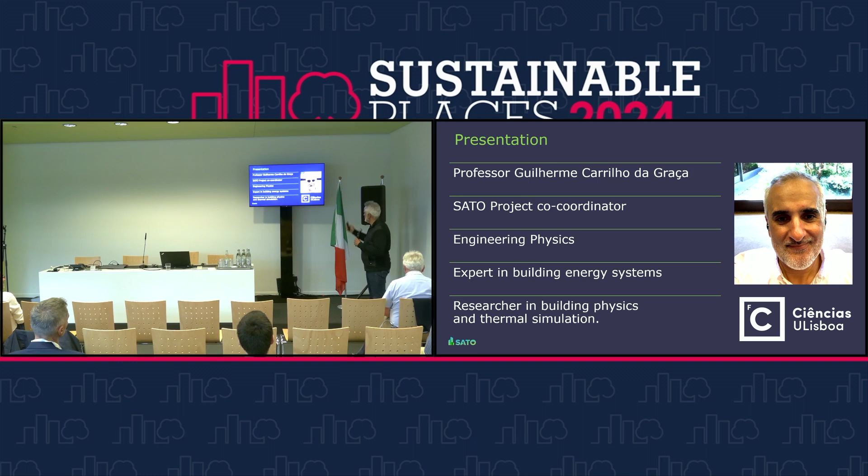I was just thinking, and I'm very confident that I will be presenting the frontal lobe of SATO. So we are now going a bit deeper, of course, and now we're at the brain level, and this is the frontal part. I don't know what it does, but you'll see. I challenge the next presenters to find the body parts of SATO that they will be presenting. That's me, so I'm working with all of you in the project. This is when I was in a private building, starting a great project. I was really happy.

So the idea of this presentation is to see an interesting application of our work. It's not new, but it could be very important, and it's related to the idea of a digital twin, which I think you're all familiar with, and the application of a digital twin to the area of buildings, and how this application actually works in the area where SATO is supposed to deliver its impact. Building on the last presentation by Miracle, what we are working on, and what can be quite relevant is how can we create a self-digital twin? So building on the self-discovery.

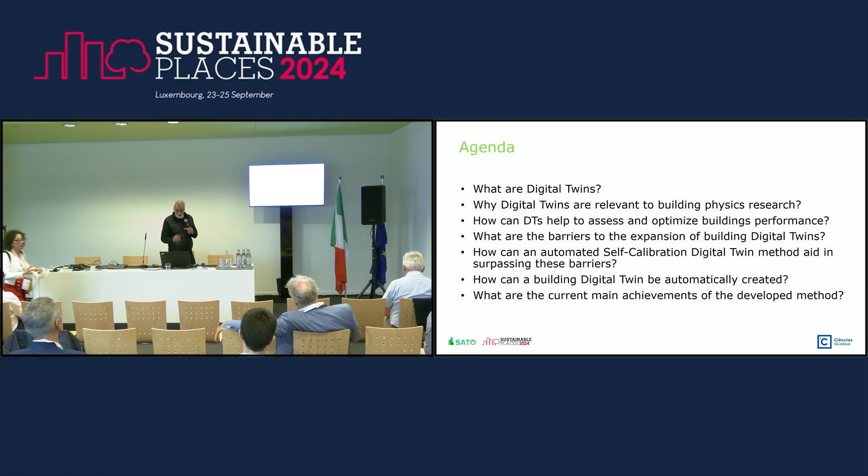The reason why the self is so important in SATO, well, it starts because the call asked for self-assessment, and I think it was actually a really good call, in my opinion. And because it will ideally work with limited human operation or interference. And of course, that's very valuable because it's cost effective. So if things happen automatically, we can save on investment of actual human resources. And in particular, when we think about a digital twin, the idea of creating a calibrated model of a building is not new. There's many instances of good calibrated models of buildings. Many, I would say 50, so not thousands. But they were obtained with very, very high investment of human resources, and often specialized human resources.

So of course, when we're trying to build a calibrated thermal simulation of a building, if we were to measure every parameter that goes into the model, or fine-tune that parameter by hand in the simulation, and compare the results with the measurements, we would have a high-quality digital twin, and we can do that today, and people have done it, but with very high requirements of expertise and human investment. And that is not realistic in light of the quantity of buildings, of the diversity of buildings. So every building is different in terms of service and commercial buildings, and also residential. And so you can't really replicate much if you're working by hand, and the investment is very large. So it makes sense to investigate a self-calibrating digital twin.

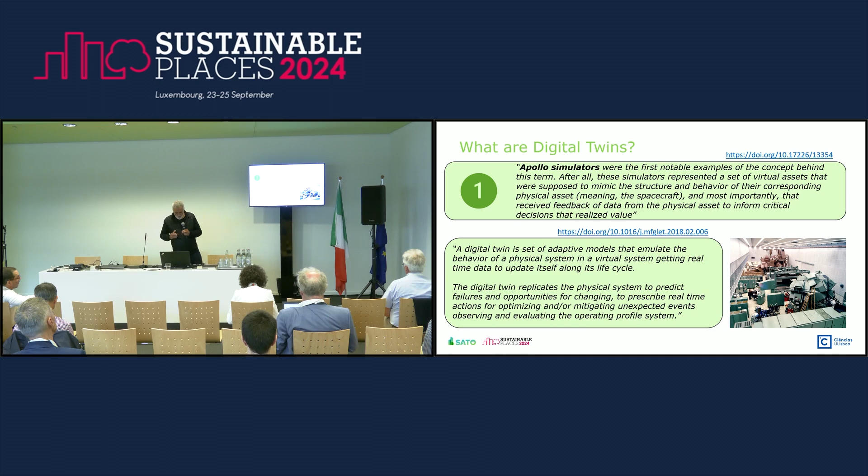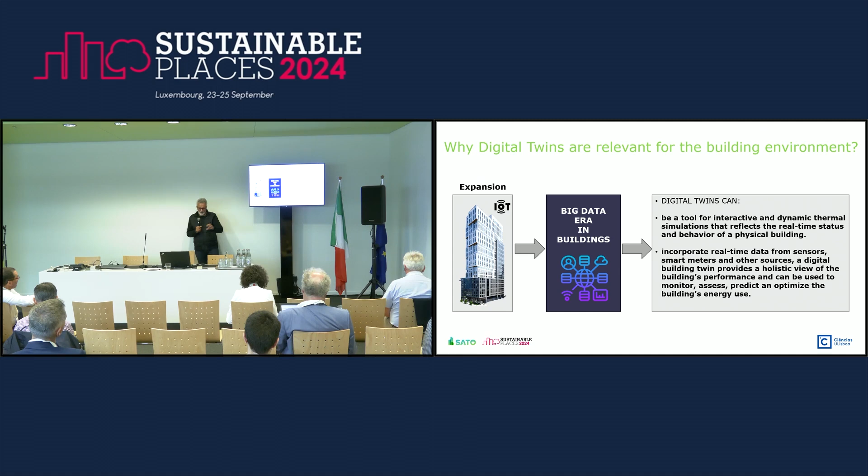The whole calibration process of a simulation, there are different ways of performing the calibration that we can work on, but the most basic is, let's say, the simulation model predicts 90 kilowatt-hour per square meter per year of overall electricity consumption of the building. Our bills show the actual running of the building. The bills show 80. So we just apply a factor of 8 divided by 9 to our results, and we call it the calibrated model. That's the most basic version of model calibration. The most sophisticated and work-intensive is going around all the parameters, measure them, put them in the simulation, look at all the building schedules, usage, and have the right number come out to begin with, without an ad hoc calibration factor. What we're trying to do with this service is to perform that automated calibration using the SATO capabilities.

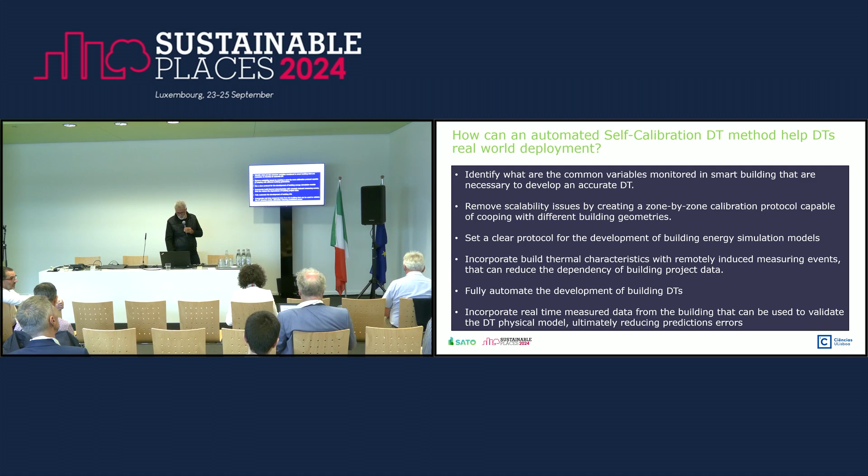And so, for that purpose, we work on a room-by-room basis. So our approach is, I've just described these different levels of calibration, and the approach that we're using is exemplified in this figure, which is a little bit hard to follow. But the idea is, as you've seen with the other presentations, we have the real building, we have a Cypress BIM model, because that's our partner. This model has a layer with thermal zones for thermal simulation, so we're coming down in terms of, let's say, realism of the model into a much simpler thermal simulation model. And this is the thermal simulation model with several zones that we will be automatically calibrating.

Now, how do we do this? What's the secret? What makes our calibration new? It has more requirements, so our calibration is more intrusive. And I think it's important to say this because it adds credibility to our claims. If we were able to calibrate by doing exactly what other people were doing, it would not be so credible.

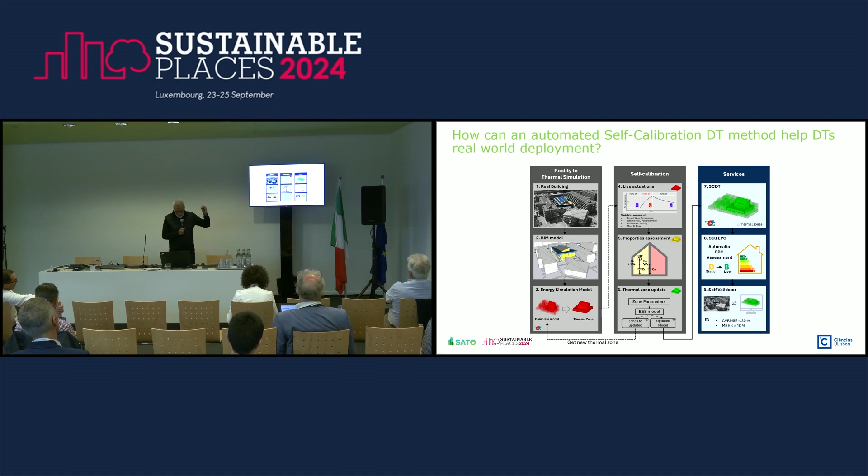So what we need to do is, whenever the rooms are not occupied and we're not bothering the building occupants, we actuate into the room and, for example, heat it and then look at the temperature decay, measuring the heat loss coefficient between indoor and outdoor. This is one example. We have a set of these virtual experiments, which are the assessments of SATO, and then we use the results of the virtual experiments, in this case an Energy Plus thermal simulation model, to calibrate on a zone-by-zone level.

You have here two cartoonish depictions of calibrations. In a room, we turn the heating system on, raising the indoor temperature, then we turn it off, and look at the decay of temperature. We fit the best U value for the external heat loss to the decay, and that's how we extract an as-built U value for the room on a room-by-room level.

We also do that in another assessment to identify the thermal inertia of the space and the furniture. These are also unknowns in many buildings, and these virtual experiments measure as-built effective thermal inertia, something you can't really get from design data. So we think this is very promising.

We do the same approach in different areas. For example, here is the work of Frederico, Nuno and João, who are working on these sites. These are postdocs and PhD students who are also in SATO, and will be presenting later.

For the heat pump, we focus on measuring the ratio between the actual COP of the heat pump and the theoretical Carnot COP. That's a parameter we focus on, the efficiency of operation of the heat pump. With this efficiency, we bring this coefficient into the simulation and obtain a self-calibration of the heat pump component of the system. So whenever there's an opportunity to perform a digital experiment or assessment, we do it, take the coefficients, bring them to the simulation, and claim we get more precision.

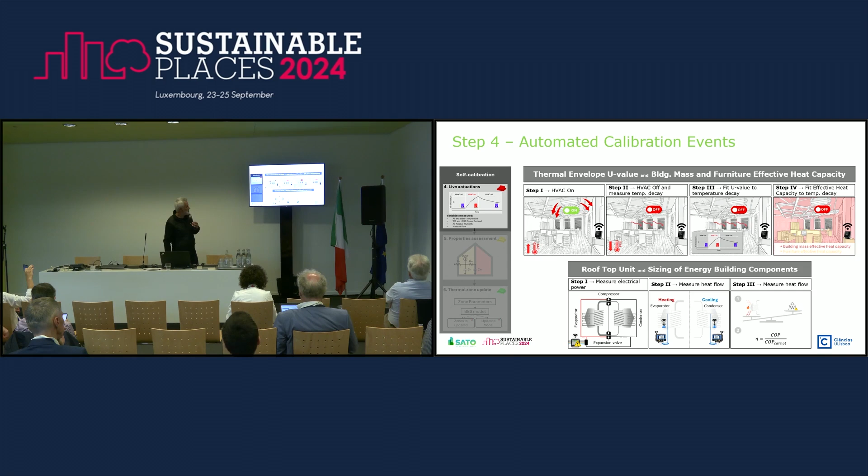This is an example of the parameters we extract at room level: heat capacity of the walls, furniture, heat loss to the outside are some examples, and the ratio of COP of the heat pump performance. I'm sorry here about the superimposition.

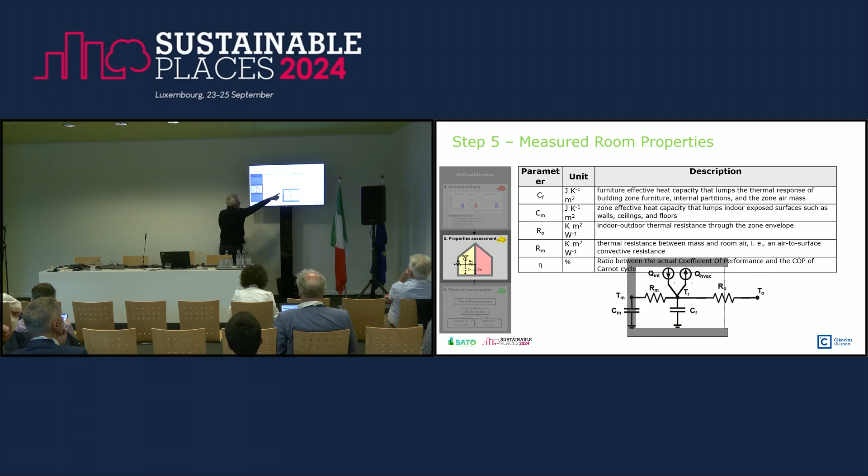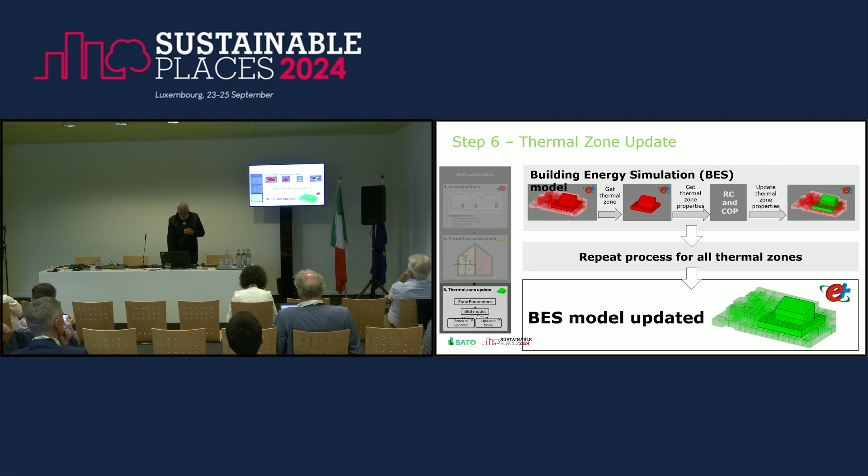Then, of course, we bring this to a model, as discussed, on a zone-by-zone level, and compose the whole overall building model. We're using Energy Plus, although that's not the main point, but there's already a connection between SIPE, which is our BEAM platform, and Energy Plus, so it makes sense. Because we are at the end of SATO and we have pilots, we already have some examples of the actual performance and capabilities of this approach. So we perform the calibration, update the model on a zone-by-zone level, and obtain a digital twin. There's some formatting issues, but it's fine.

So we have inspections, which are our assessments. They calibrate the twin. And then in terms of energy performance, we are able to update the theoretical EPC to an as-built EPC using the calibrated model.

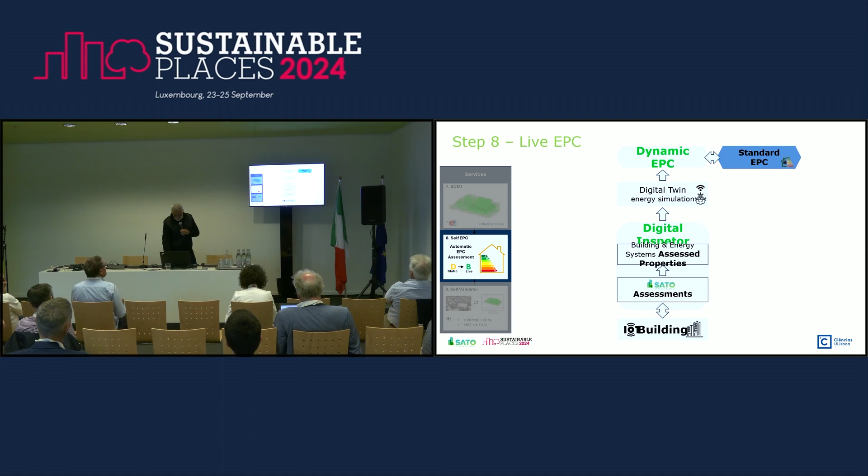Now let's look at the application of this in the pilots. Some pilots of SATO are residential. We have focused on detailed multi-zone thermal simulation for commercial buildings. As for residential, it's not the common approach, it's too heavy at the moment. So what we show you are applications in pilots, and then you have four levels of calibration.

You start, well, line number 1 is the measured temperatures in the building. Line number 2 is a simulation, let's call it standard. Number 3, we bring in the self-calibration at room level. And then in number 4, we bring in the HVAC calibration.

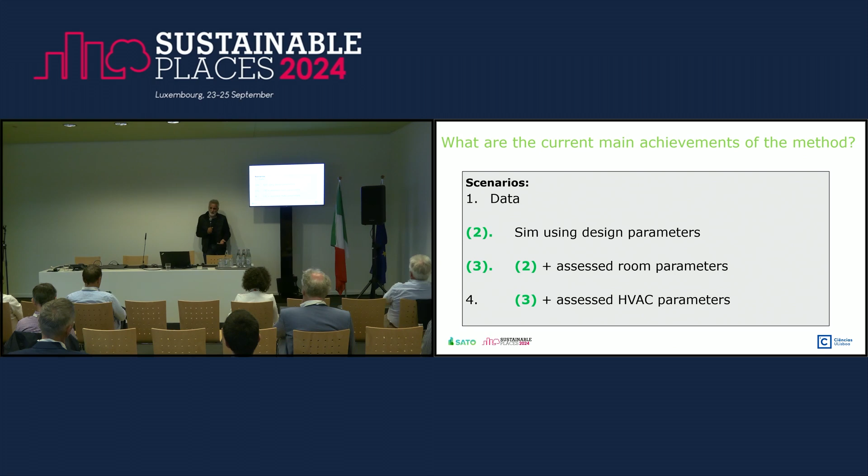The HVAC calibration, you can see in two places, because we are able to measure the effective heat delivery and removal of the HVAC system. So you get a better depiction or simulation of the room temperature profile when you turn the HVAC on and off, because we actually see how powerful it is in a given room. That's one level of the HVAC enhanced calibration process. And then at the thermal plant level, if we calibrate the HVAC model, we of course have much better predictions of electrical energy demand of the building as it's being used.

So we have two examples. This is an office building from one of our partners, in Seixal. We have one zone there where we have enhanced monitoring with SATO.

We have the whole building, but then we have a particular zone where the municipality installed new operable windows as an investment, so they're exploring. They're already installed in this zone. We have new windows, they invested, and if it works well, they may consider extending to the whole building, as this is a great building to have operable windows, and also a great climate and very peaceful neighborhood to do that. So we hope to have a good effect here.

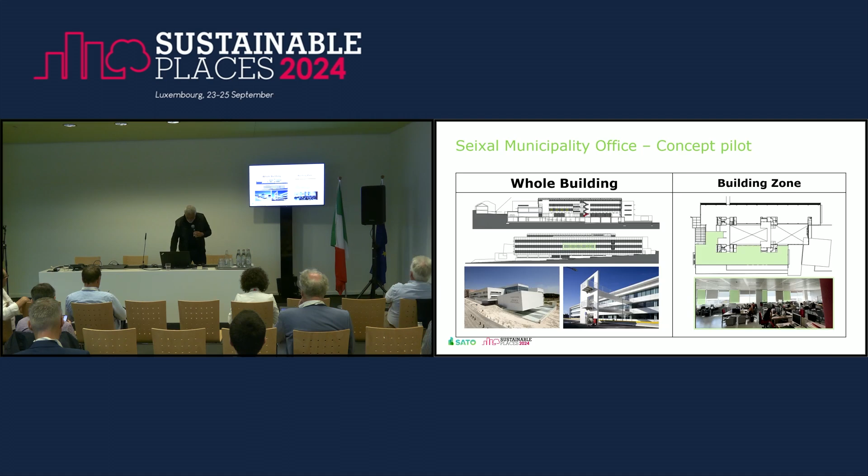The example of application from level 1 to level 2 is going from the purple line to the dark orange yellow line, where the measure is red. In a standard simulation model, you have issues with the effective thermal capacities of the zone that we are able to pick up by performing these experiments that give us the calibration. This is about as bad as thermal simulation can be, so it immediately changes the zone temperature very fast. This is a bit exaggerated. We are able to pick up both behaviors better.

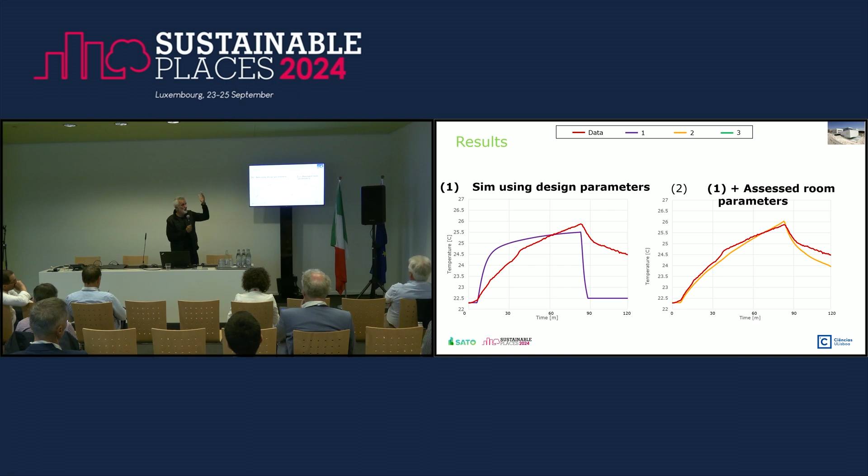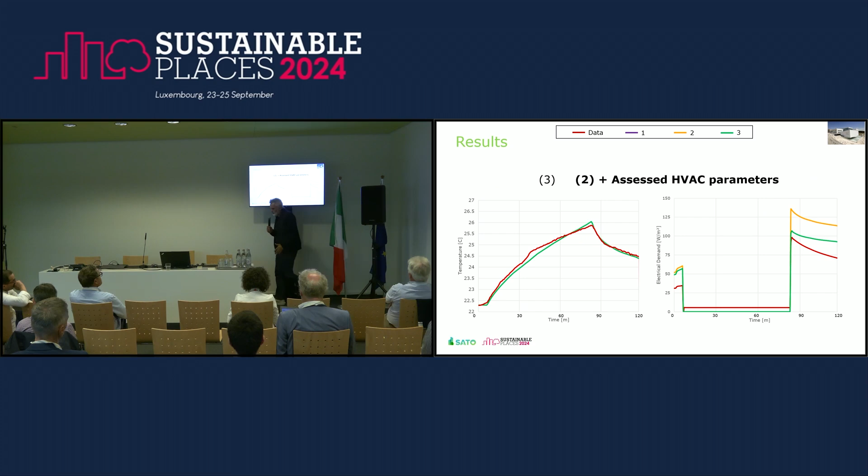As we add a finer, automated fine-tuning of the room HVAC, we get to the other levels of calibration, where we have a really quite excellent fit of the temperature. Let's automate it. Then we have improved fit, not perfect, of the electrical demand, where the data is red and we are green. So we're not perfect. Okay, nobody's perfect. So that's where we are.

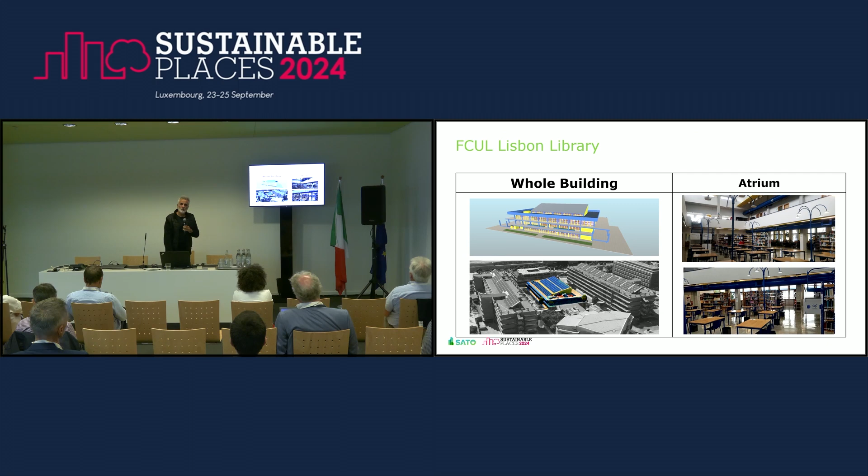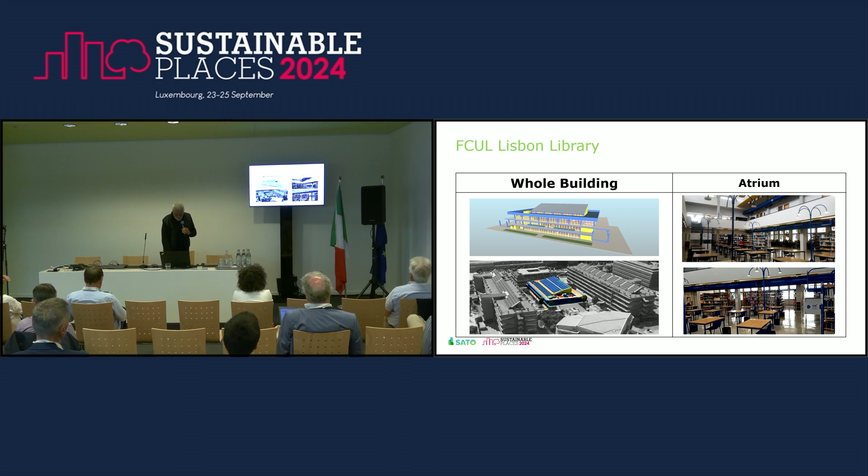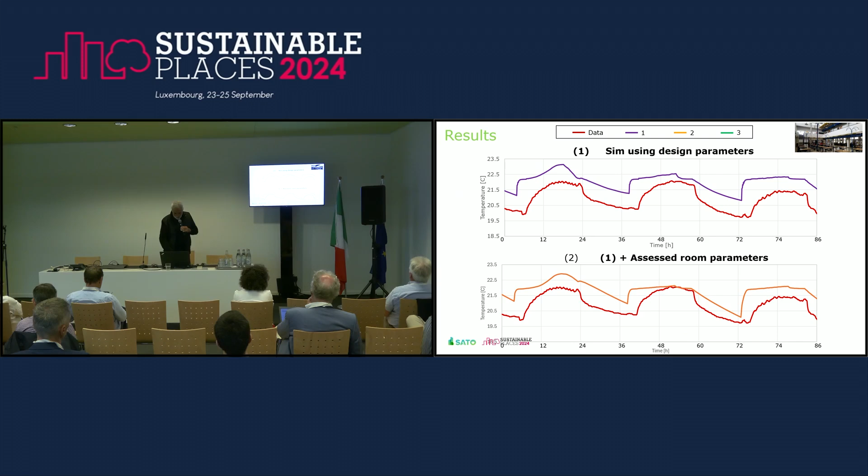Overall, where we are with this service is, in our perspective, we reached a good point with it, and we see a really good potential for energy optimization, energy refurbishment, and of course the whole idea of being autonomous. That's where it connects to discovery, because what Vinicius and Miracle showed related to self-discovery, you also have self-discovery of the capability of performing these experiments and when. So this looks really nice as something to be continued. Thank you very much.

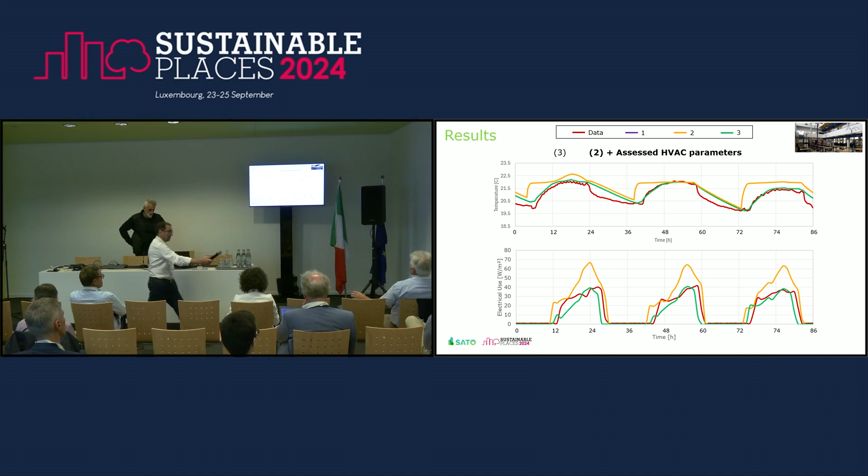Yes, I have a question, because now, of course, you have done two specific calibrations, one on the room properties and one on the HVAC properties. I would say, of course, then the results on these two issues are reflected to be quite accurate, because this is where you did the calibration. But what about other parameters where you did not do calibrations? How does the model perform on these parameters? Does it also improve those parameters, like I would say indoor air quality? Is the model now calibrated so it can actually do the indoor air quality?

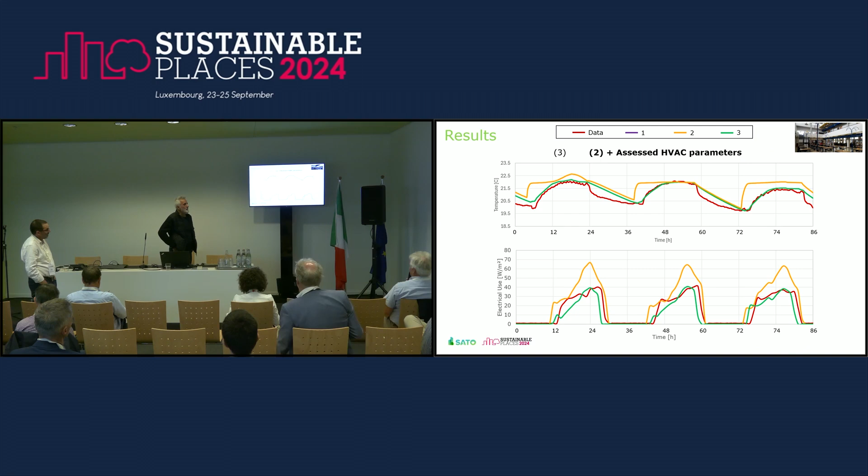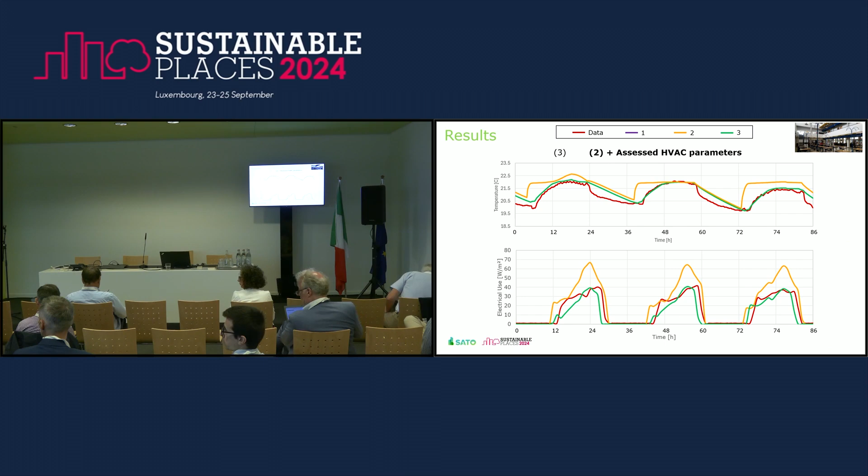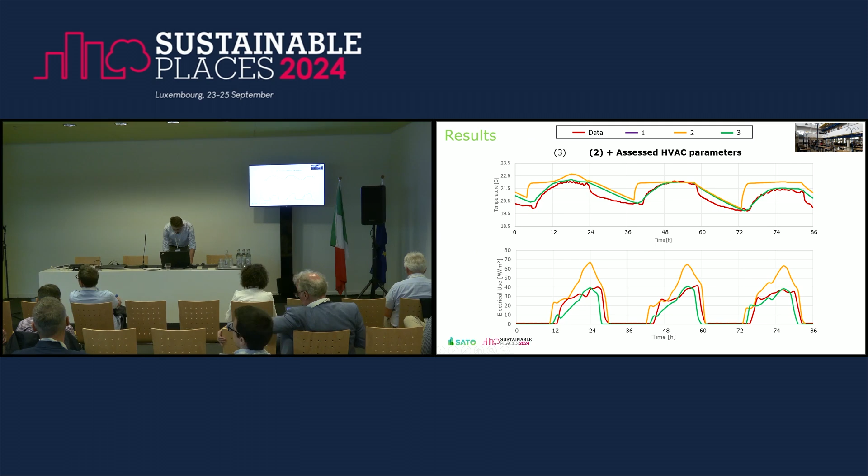So the work that we are going to present now, it was actually a challenge that was raised by our project officer when we were in the grant agreement negotiation stage, right before signing the contract. And it was about designing or developing methods that could be used to assess the real-life performance of appliances. So what Zygi will present is about this work, focusing on clothes washing machines, actually.

Thank you for the introduction. While I was listening to other presentations, I was thinking of the analogy that we have the brains, we have the heart. So perhaps that could be a good analogy.

Okay, so I'm going to present just a brief overview, not going to go into too much detail, about appliance real-life assessment. As we know, appliances consume a lot of energy amongst the total household energy consumption. So to mitigate this problem, of course, the European Union

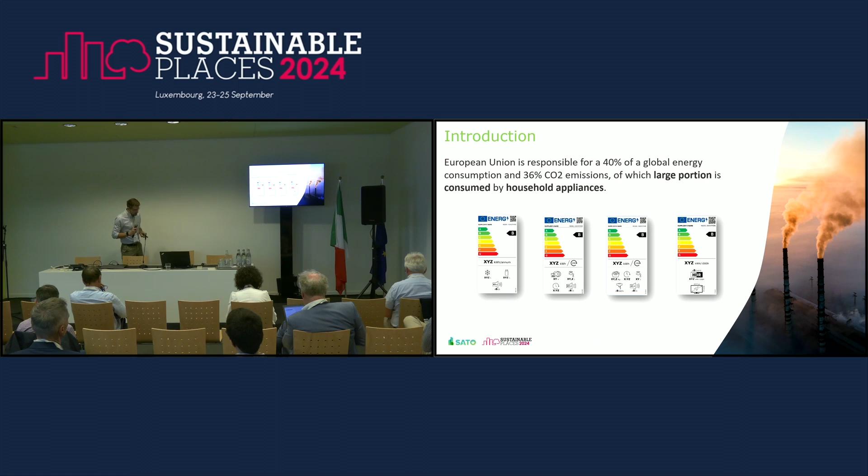created labels for the consumers, and it also creates this initiative amongst manufacturers to make more efficient appliances. But there is a problem, because the labels are quite static and they do not really consider real-life factors. So this is the main problem.

It doesn't consider the real utilization and operational factors. For example, in washing machines you can select multiple programs with multiple temperatures, environmental conditions. So, for example, how the appliance is affected by the ambient temperature, because sometimes people have washing machines, let's say, on the balconies, sometimes inside. So how does this affect it?

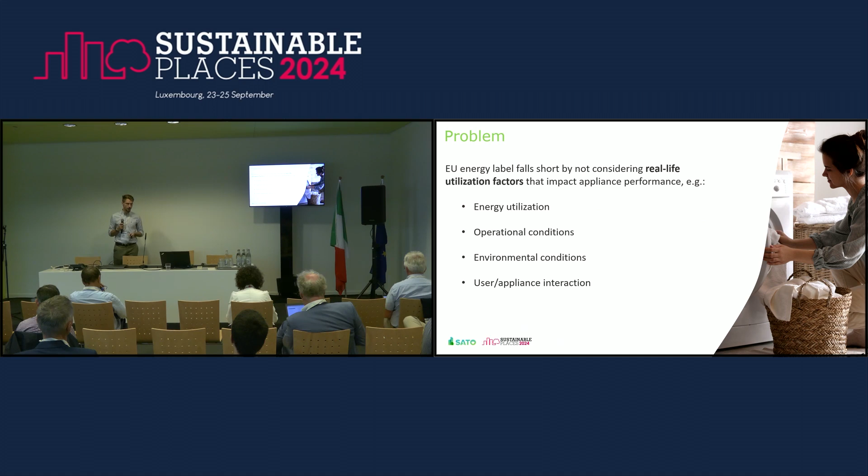And of course, the user-appliance interaction is not considered. This is the problem. And to work on this task, we have some limitations.

The first limitation is that there are no datasets available to actually work with. So we had to create our own datasets. And of course, there is no definition of what is actually a real-life assessment. These are the main keys in this presentation.

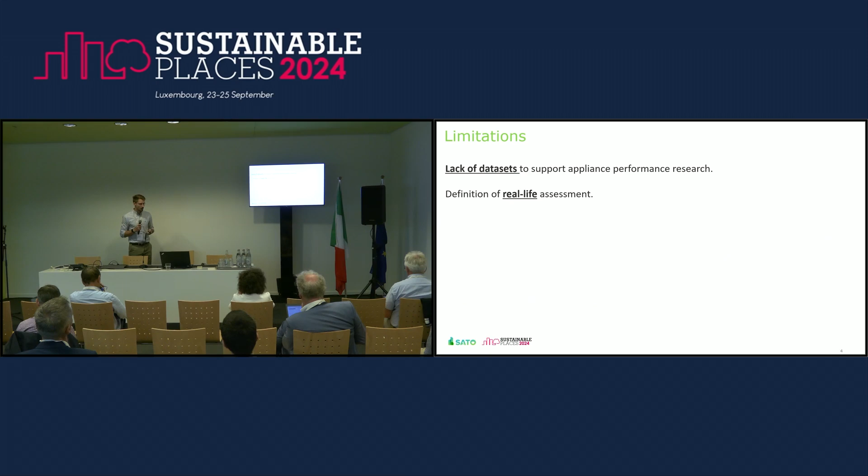So, starting with the lack of datasets, we started with data acquisition, measuring in the laboratory and in the household. We're acquiring environmental data - temperature, humidity - and operational data, so acceleration. We have water flow in and water flow out of the machine, so basically the consumption of water. The water temperature we measure through sensors, which I'll explain later.

We also measure drum temperature and door temperature, so we attach a sensor on the door of the washing machine. And for energy, we have measurements like current, power, voltage, frequency, and power factor. In the laboratory, this is done using a protocol.

So when we are acquiring the data, we label it - what was the temperature set in the laboratory while we were doing that, and of course the programs that were available on the machines. This is important.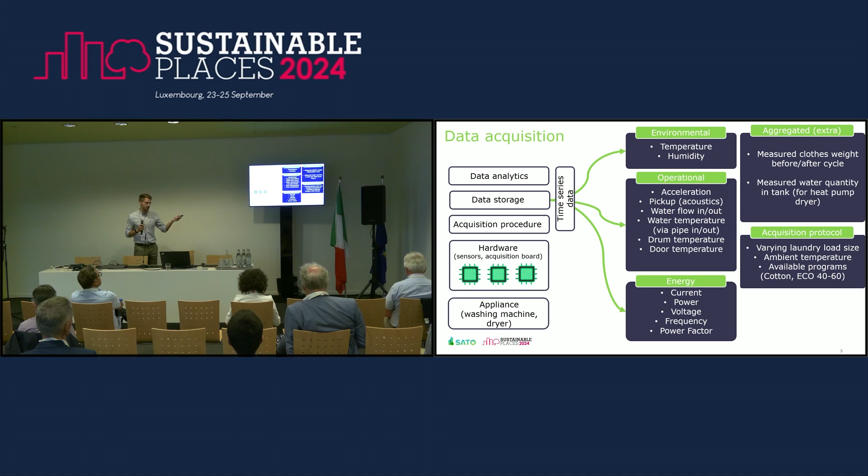So a little bit of parameters - we have one sensor on the top and the side, on the back. We have the current sensor. We put a sensor on the door, and we attach one on the drum.

And we also have water flow sensors, and we attach temperature sensors on top of the pipes to try to measure the water temperature. For the dryers, it's a little bit different because we put the temperature and humidity sensors inside the lint trap chamber, and of course we also have the current sensor and the accelerometers.

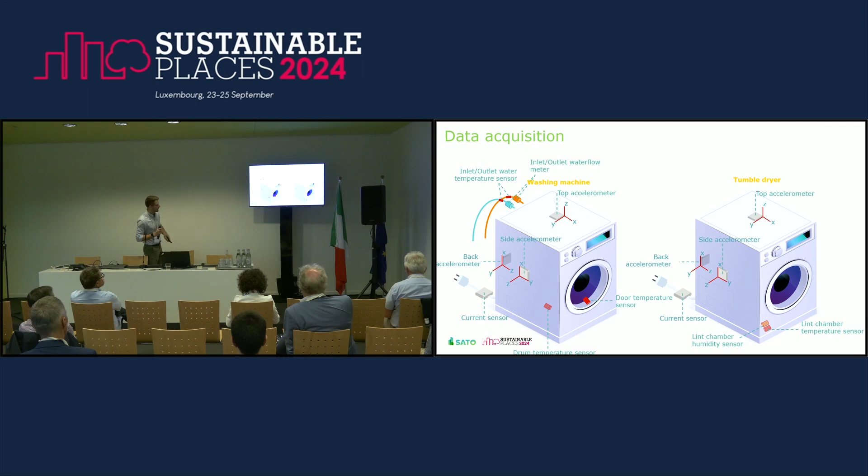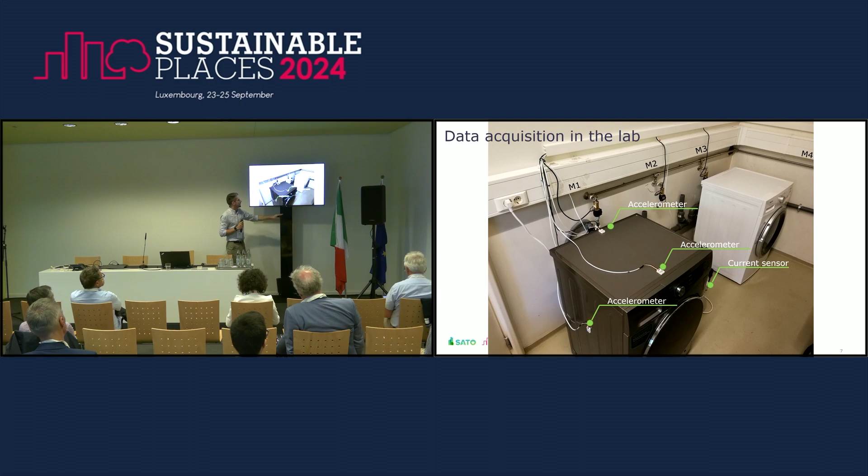Just a little bit to show how it looks like in the laboratory. This picture is actually old, because currently the accelerometer is in the middle. And here you have water pressure sensors and water flow sensors and all that. So this is basically the setup in the laboratory that we are working with.

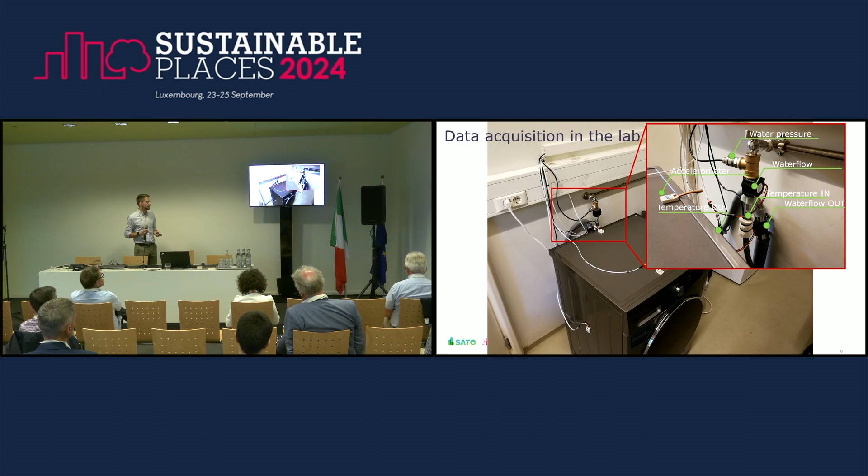To control the temperature in the laboratory, we have a big AC unit while we are doing the data acquisition. Okay, so this was the laboratory part.

And we also deployed in the SATO pilot the acquisition boards. We developed data acquisition kits that were a smaller version, let's say, of the acquisition platform that we have in the laboratory. And of course, we use exactly the same sensors, the same acquisition frequency, to replicate as closely as possible what we did in the laboratory.

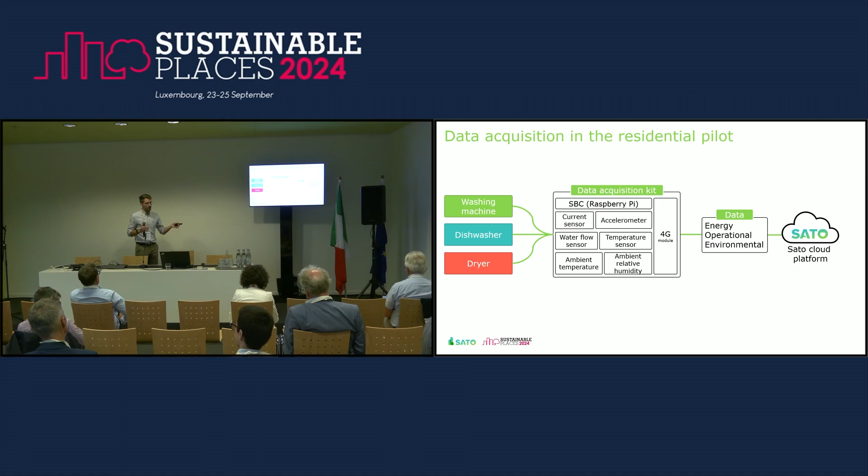And then, of course, all this data is being sent to the SATO platform. So this is how the acquisition box looks like.

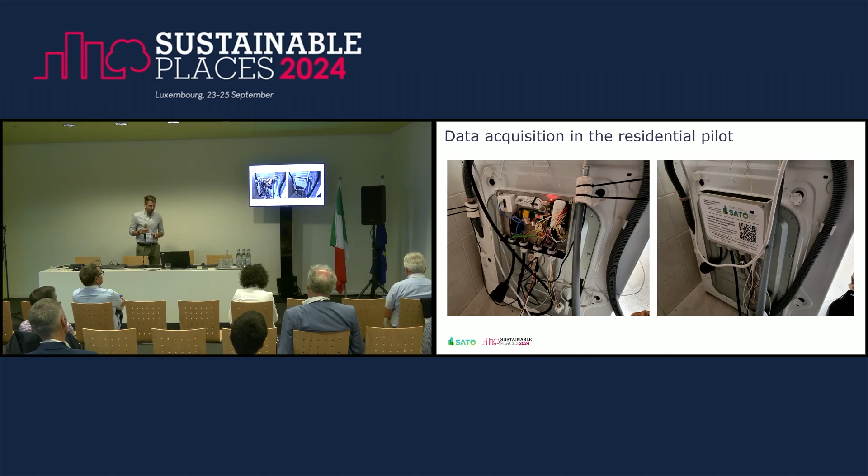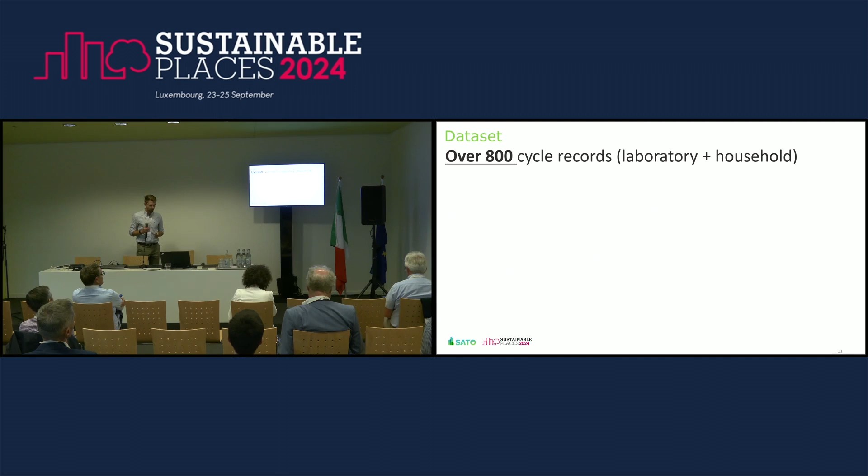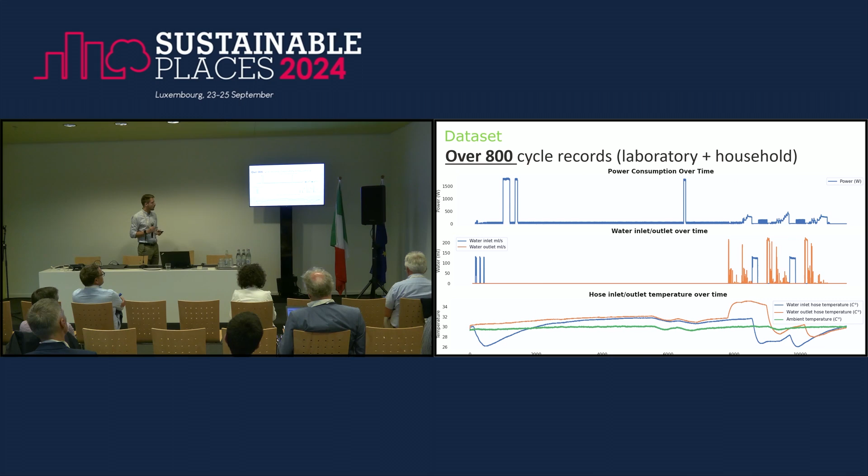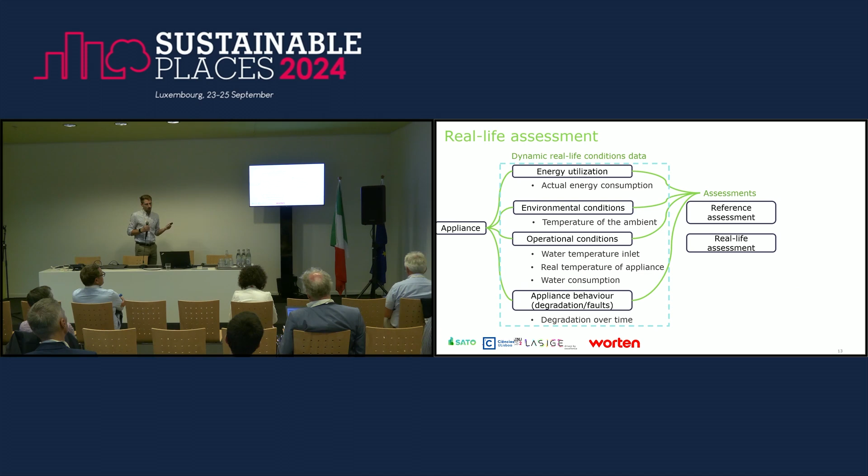Okay, so this was the dataset part that we were working on. Now let's go to the real-life assessment. So what can we do with real-life assessment? We can do reference assessments and real-life assessments. What are those? Reference assessments, basically we can use the data that is available for us from the EPREL database to compare baselines of what we are acquiring and what is registered officially in the EPREL database. And then we can do the real-life assessments. So based on the data that we acquire, we can do, for instance, resource and service provided KPI. And of course, the resource consumption, so how much water was consumed, and, for instance, the environmental impact, which would be like CO2 produced.

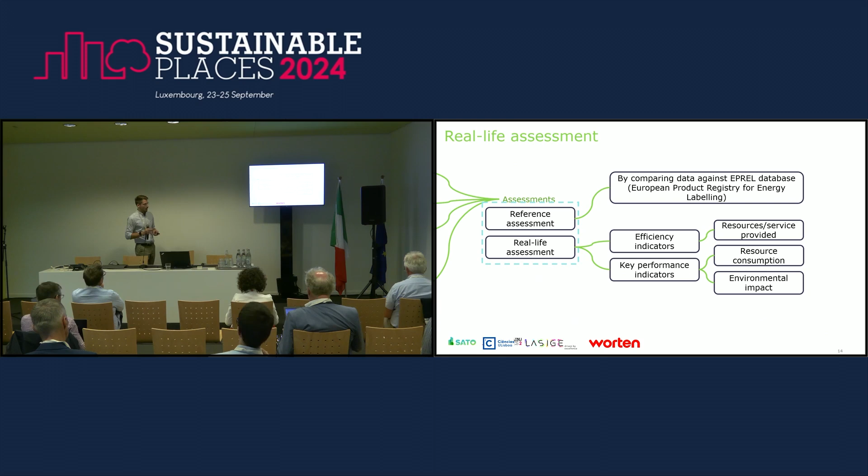So how can we do these real-life assessments? Of course, when we gathered enough data, we started to look into the data to explore it, to see what's going on. Because to calculate the key performance indicators, we need to know the weight of the clothes that were put in the machine. We cannot ask the user every single time to provide us this information, so we have to extract it somehow. So we came up with this soft sensor approach.

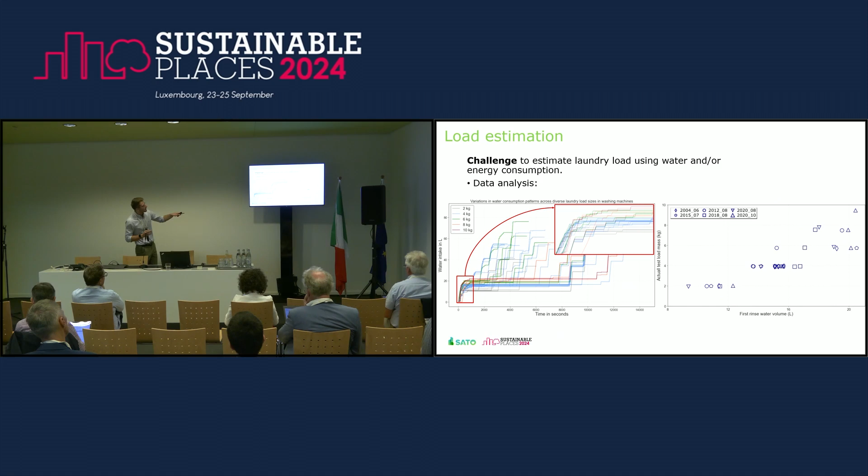Okay, and here what we see from the data analysis is that the first rinse of the washing machine quite well represents the weight that was inside the washing machine. It's almost a linear model, basically. So we worked on two approaches to extract the weight in the washing machine. The first approach, that I was mentioning, is that we use the amount of water that was taken in at the first rinse. Then we apply machine learning models to extract this information and estimate the laundry load.

The second approach was to try to do basically the same thing, but using only energy consumption data, so not including the water consumption. Because the idea is to reduce these additional sensors as much as possible, and ideally just plug the appliance into a smart plug and have all these assessments done for us based on the energy consumption data. So in terms of KPIs, what do we have? We have two main KPIs: water consumed per kilogram of laundry load, and energy consumed per kilogram of laundry load.

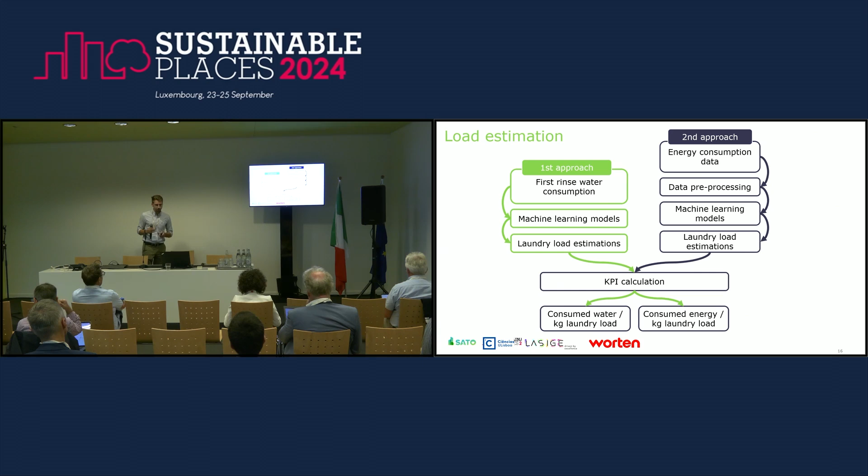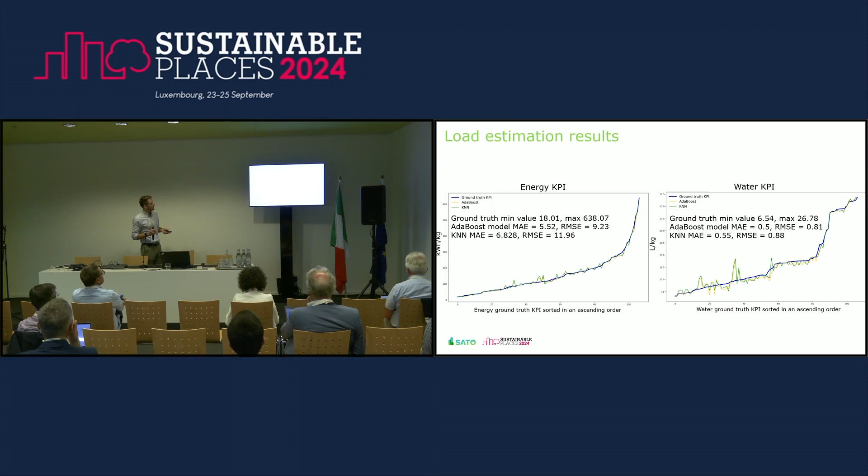Okay. So these are the results from both approaches. The first one is based on using the first rinse water amount to extract the kilos that were put inside the washing machine. And the second approach, right now, is a little bit worse than the first one, but we have some ways to mitigate these false estimations that I will explain a little bit later for you. And these are the results of already calculated KPIs. So you have the ground truth and the predictions of the KPI, for the energy KPI and water KPI.

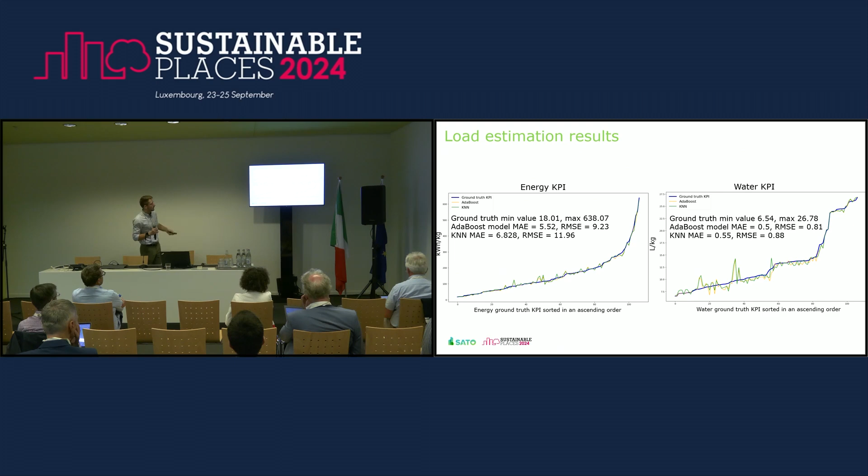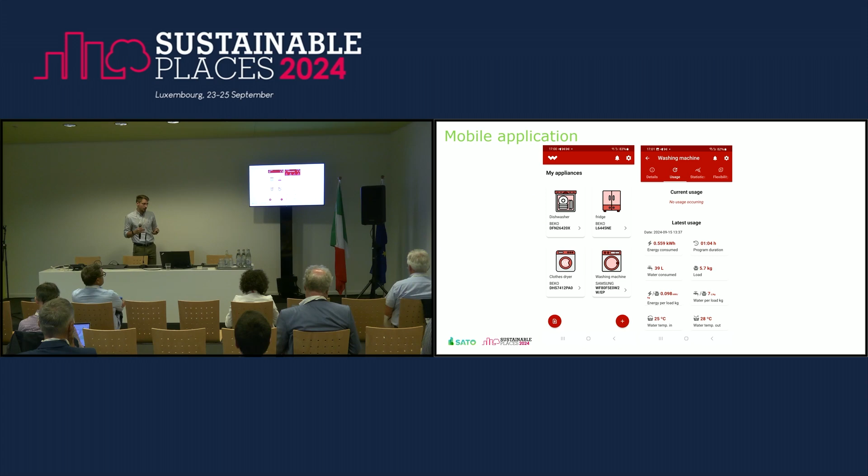Right. So we do have a mobile application developed, and the users that are participating in the project have all this information available in the mobile application. So why is it good? People can compare their washing practices, for example, depending on how much clothes they put in the washing machine, what kind of program they selected, what was the impact on how much water and energy they consumed, and how well the machine was performing in terms of the KPI. This can help users decide better washing practices at home.

So, for the conclusions, we created this system to acquire and support laboratory and household research for real-life energy efficiency, and it resulted in a data set that is going to be publicly available.

So then, of course, we also defined the real-life appliance energy efficiency, how we can calculate it and present it. We have models that perform fairly well to estimate the laundry load. It is actually very important to calculate the KPIs. And we developed a mobile application that helps consumers to make optimized choices, or to help users, to guide them to make better choices in terms of their washing

Check. Okay, that works. Hi, everybody.

Okay, analogy to the body. I think that all these assessments that are taken in SATO, or provided by SATO, are basically biomarkers. So what we are trying to do is to get it in some sort of a format that is understandable for the patient. So, Konrad, drink less alcohol, or stop smoking. This is basically what the smart readiness indicator is, I would say, for buildings.

So forgive me my ignorance that I'm showing you the next slide at this conference, which is called Sustainable Places, because I guess we are all aware that a lot of energy is consumed and used in buildings, and that we have to get our emissions down. And that's why the European Union really tries to reduce them by 2030, and we are trying to become decarbonized, especially in the context of the building stock, by 2050.

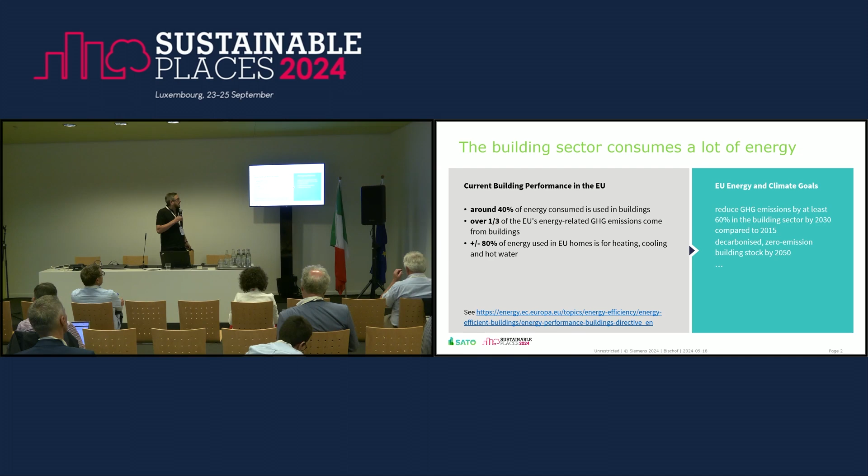So in order to do so, the smart readiness indicator was introduced, and that's a framework that is going to be used for rating the smart readiness of buildings, because things like SATO and other projects and methods presented here help to optimize building consumption. As we've seen before, if we control when we open or close our windows, we can drastically reduce the energy used by the HVAC system. So that's something that will help us to reach that goal.

And currently the SRI is in a testing phase, but it's going to become mandatory in 2026 for buildings of a certain size. And what it does is it assesses a building's capability in three main domains. On the one hand, we're looking at the energy efficiency and the overall in-use performance of a building. Then what's also necessary these days is that we can adapt to what the user actually wants from the building. And the last thing is the integration of buildings into our energy system, because basically they're batteries, and we can use them, for example, for peak shaving or participating in energy communities and all these kinds of things that further help us to make things a bit more optimized.

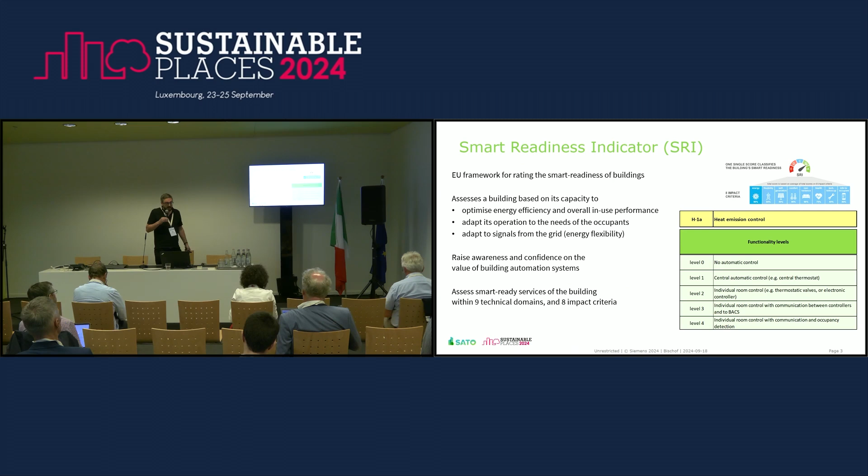So basically, this assessment is done in a building based on 9 technical domains and 8 impact criteria. And you can see here an example. We have functions that can or cannot be present in the building, and they can be present at certain levels. We start at level 0, which is the least smart way, so to say, and level 4 is the smartest way. Here we have heat emission control, and heat emission control level 0 is that we have no automatic control, and level 4 would be that we have individual room control with communication and occupancy detection.

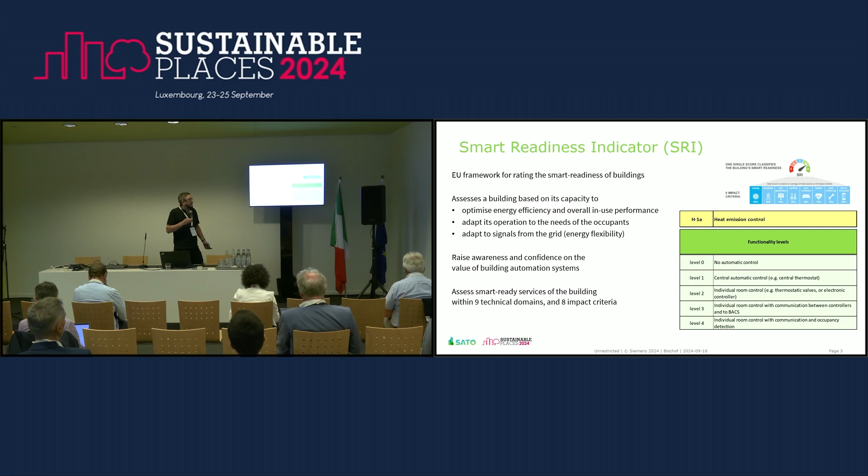Now, how do we come up with the smart readiness indicator of a building? Well, basically, we have for now an Excel, so there are several versions now, and we take the building operator and an expert, and they assess the building.

They have a look at the documents, they have a look at the building models, if there are any, what appliances are in there, and they basically rate the building, and they go through all these functions that are there, and they basically then assess whether or not a function is present and at which level it's present. And they, of course, also have to specify where the building is located and what the use of the building is. This all comes into calculating the SRI.

So we have this done for all the pilots that we had in SATO at the beginning of the project. But this is something static, right? This is something that you do once, and you don't want to do this every year, because this costs time and effort. How can we get from something that is currently static and maybe done once to something that can be performed continuously?

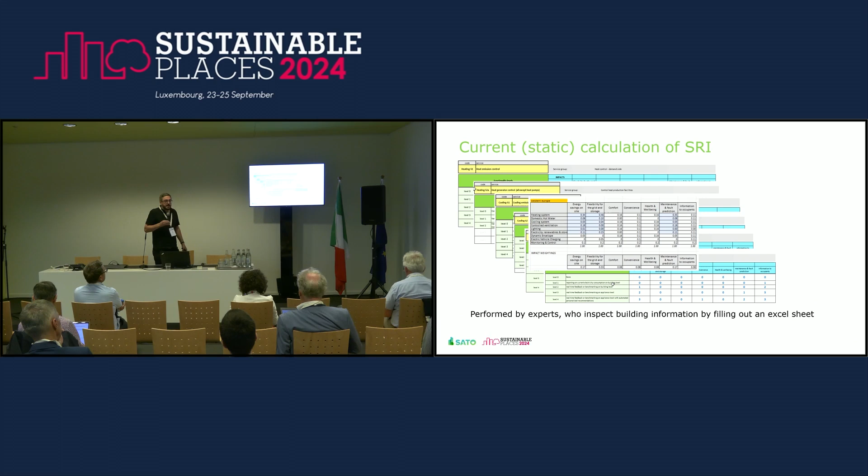So what we can do is look at the assessments and, of course, at the services, which are accumulating several assessments together and then using them to optimize the building, in order to see what SRI domains and services they actually impact. And this is something that we did. So we basically went through all the smart-ready service functions. There are two ways of calculating the SRI: a simple version and a complex version. We took the simple version because it has fewer functions.

But what we can do is basically assign SATO assessments to a certain function. Say, if this assessment is present in the building, then we can assume that this building has a functionality level for this respective function of, for example, 2. This is one way of doing it. Another way would be to say, if this assessment is present and we get a certain value out of it, then this indicates a certain functionality level.

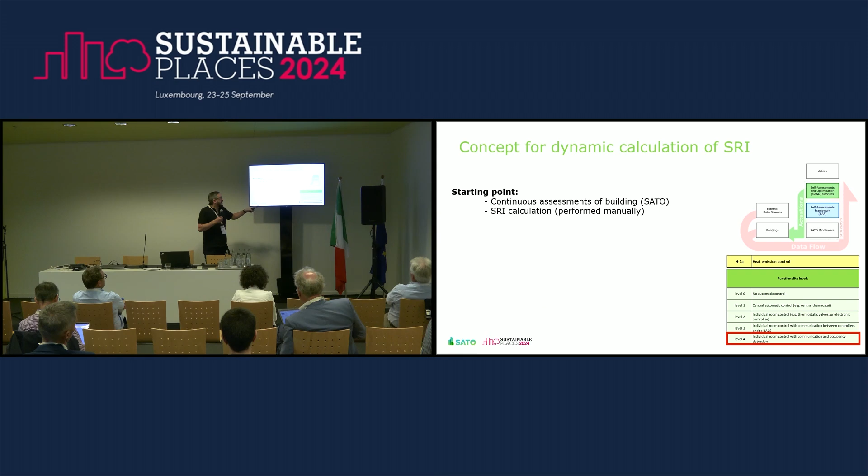Now, this is basically where we're starting. And once we have this link between the services and the assessments, then we can do a recalculation, whenever we please. Let me just go back. Let's consider, and this is a very coarse example, that the expert looked at the building and said, based on what I see in terms of appliances, we have level 4 because we have individual room control and occupancy detection, and those things work together.

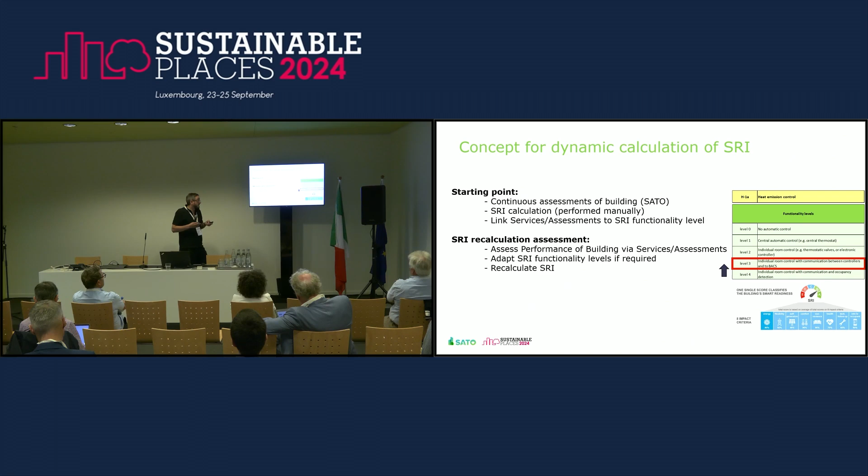Let's assume that. And now the building is in operation, and we basically see that heating is not really linked with occupancy detection. While these things are there, they're not really used. So while the appliances in the building suggest a readiness level of 4, in actual use we see it's not really there. This is what I meant before, giving us some feedback and telling us, hey, do something. Because maybe there's something wrong and we have to check level 4.

So how do we calculate? We're back at the semantics. So basically what we decided to do was to use semantics to do the calculations. As I said before, the SRI is currently in a test phase implementation with Excel sheets where we can basically put in the information. But this is, for a computer scientist like me and others of you, not really satisfying. There's a lack of standardized information model exchange, and how to version them properly.

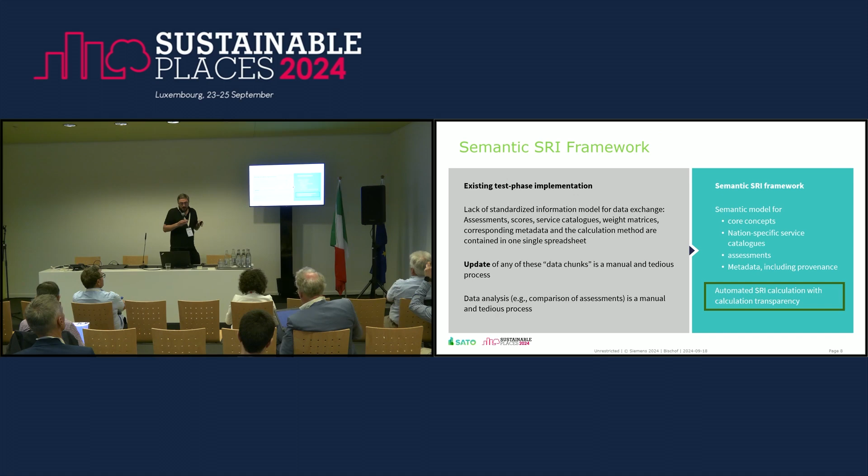So a better way of doing that in this concept, and this also ties in perfectly with the SATO core, is to use semantics. Basically derive a semantic model that incorporates the core concepts, also all these things concerning different national specific services and regulations, and allows us to calculate this. With this, we are able to calculate SRI automatically, and it's transparent how that works.

So here's just why this is a cool thing. It makes things fairly easy and really integrates well with what we have in the SATO platform, because we don't have to fill out anything anymore. It calculates and we know why it works. And the nice thing is, for the future, it's also easily integrated with other existing building models, such as Brick, BOT, and so on.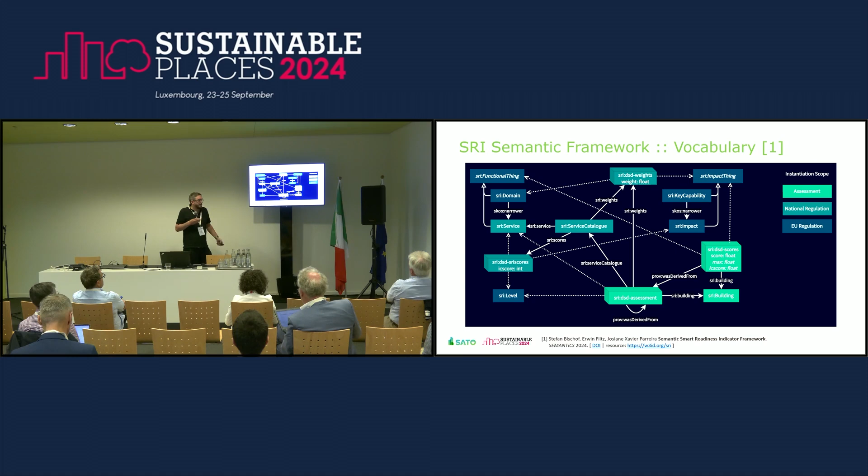Okay, this is basically what we have done. Now, how is it working in the system itself? What do we need? Initially, we need some sort of a baseline SRI. For this, we can use an SRI assessment performed for a building, so we have here an Excel sheet. What we also need, in some sort of format, is this link between assessment and SRI. These are inputs we require, and we upload them to the SATO platform, convert them into an ontology and store them in the SATO knowledge graph, where they reside.

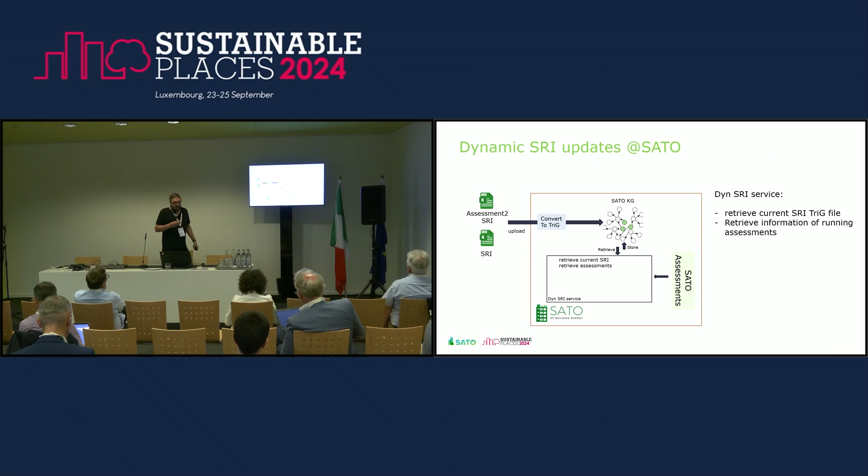At regular intervals, and we don't have to do that too often, every month or every half year, we retrieve the information stored in the knowledge graph that represents the SRI calculation of this building, in RDF, adapted because things might have changed. Maybe something came into the building. We retrieve all the assessments present in the building, and then we can match them because we have this link between assessments and SRI. We can check: is the TriG file we have still okay, or do we have to change it?

If the TriG file is outdated, we of course have to update it according to what we got from the system. We can recalculate the SRI and store the results for the user to see what's going on and that things changed, writing back the information of the new TriG file. So basically, we update this SRI sheet, but in a different format, automatically, and it will always give us an updated version of the SRI.

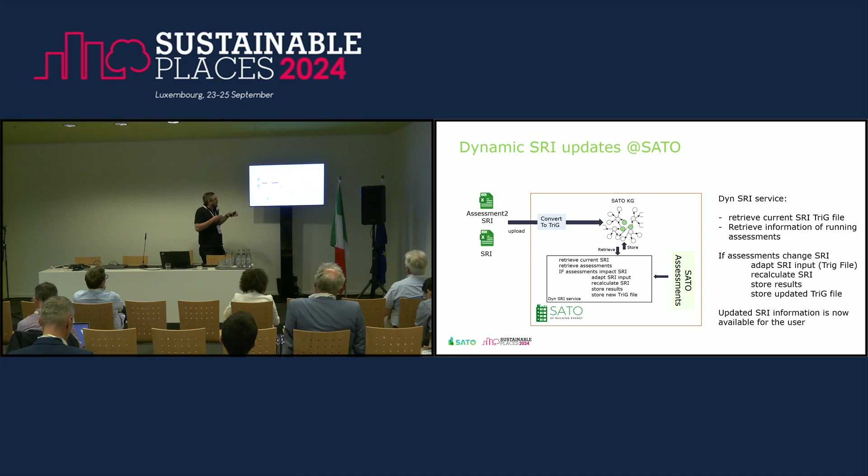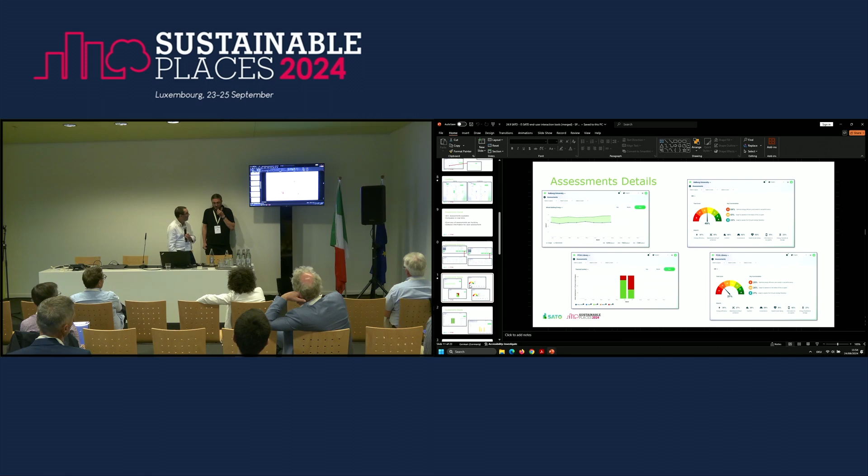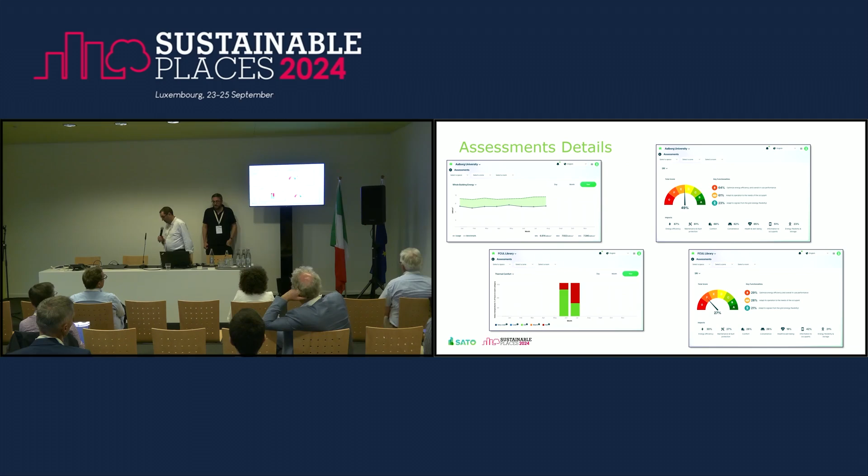So here, what you see is actually the output of correlating all this information. The overall score that you get, which I think also conveys the idea of how capable your building is of integrating smart services for flexibility, for the potential for energy efficiency. That, I think, is it.

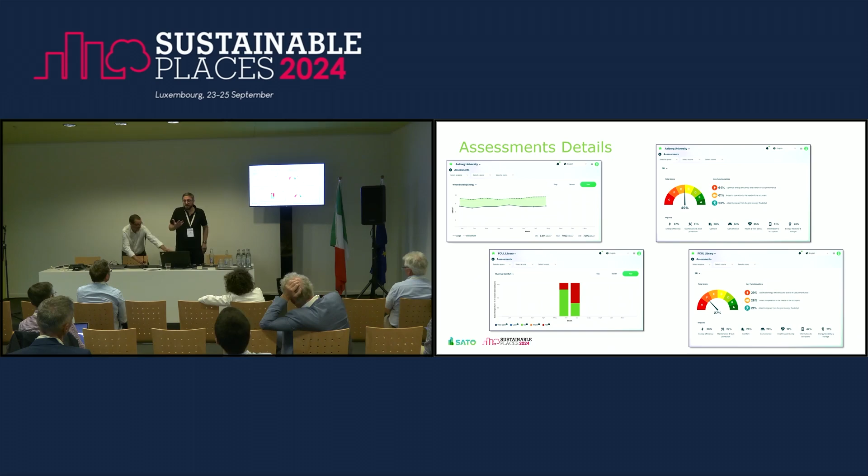Thank you very much. Thank you for your presentation also. I have one question. How do you instantiate your knowledge graph initially? Yeah, we have kind of an ontology that represents. Is it done manually, or do you? No, automatically. Everything is done. You need a certain quality of your Excel sheet, I guess, yeah? Okay.

Also a finding when we tried to basically build the ontology, because we have to dissect the whole thing to see how the calculation works. Okay, thank you. Thank you. More questions? Okay, then thank you again, Konrad, for your presentation and for the discussion.

We move to the last part of the workshop, where we will have a panel discussion. And this is centered on the current challenges that we can identify to smart innovations and smart self-assessment and optimization of buildings. So I would like to invite Per Heiselberg and Guilherme to come here to the table and start this discussion with me. And I will try to trigger it from one point of view that I've discussed with Guilherme many times,

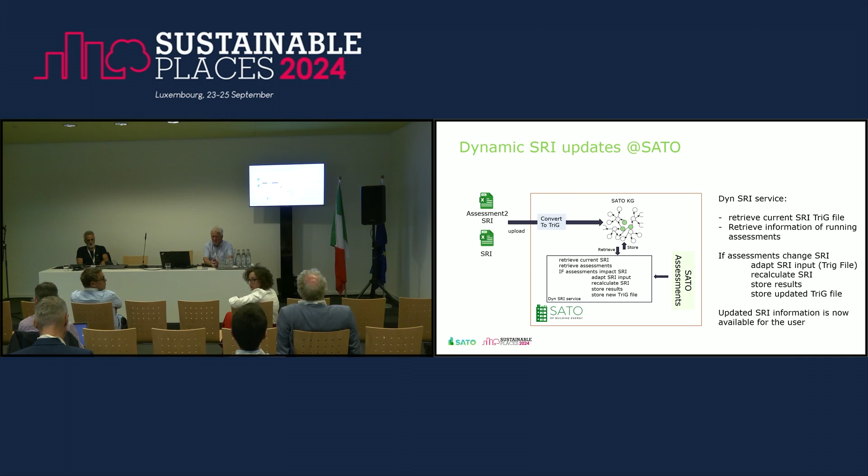I'm part of the project as well, working with residential pilots in Portugal. I think our main difficulty was once we install the sensors - sometimes we don't have much control about the placement because people only have power plugs in certain places, so we need to install it there. Or people sometimes, after we left, change it to a different place and now we don't exactly know where it is. So besides the barriers on data security and technology, there is this human barrier that's very difficult to overcome: conveying to people how these systems will work, what they can get out of them, the advantages. I think this was one of the main struggles because these projects take a long time - from when we initiated monitoring until we gave something back to people, it takes very long, and people start to ask questions and lose motivation. So I think this was a very big struggle.

This is also something we share in SATO, showing results from our Seixal residential pilot near Lisbon. Many things happen once you deploy things there - again, the quality, availability, and reliability of the data varies. It's quite difficult to control.

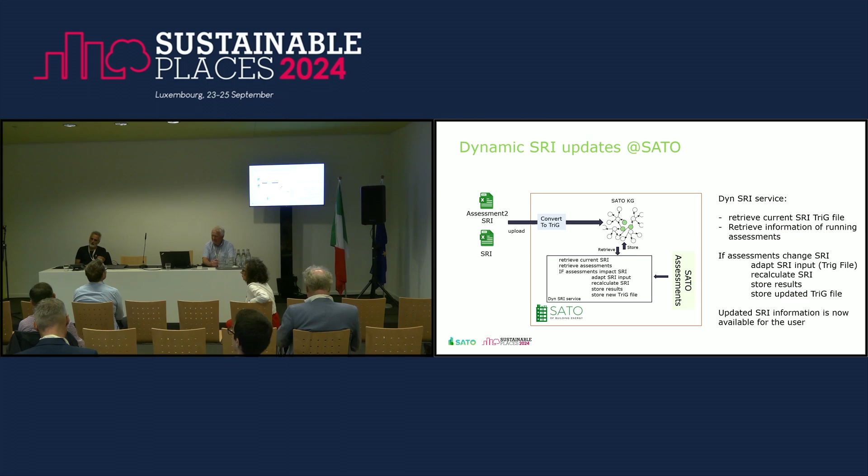Let me try to answer at least partially. It was a very specific application that you described, and I did not fully understand all the details. But I think the question was if we could deploy some of our developments in that kind of environment, to make it easy for cooks to get at least some idea of the energy impact of their varied practices. I would say it's possible, but it would require adaptation, because our use cases were for specific buildings. But the architecture of the platform we have would perfectly fit there.

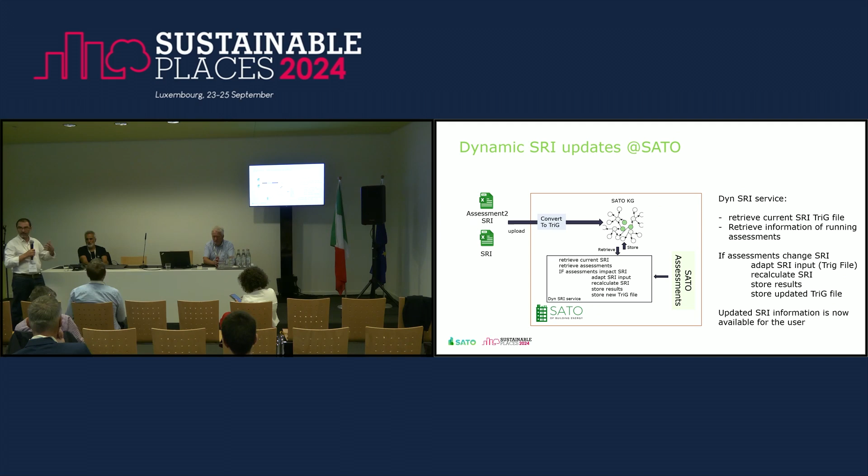If I can summarize a bit, I think there were three challenges. The first was about data reliability that we have overall - it brings a ton of fault tolerance; we need to account for many fault tolerance mechanisms to maintain systems running and functioning as expected. There is a challenge in user adoption of the systems, which has a consequence in the exploitation and adoption of the systems. The third challenge was about the usability and usefulness of the products we deliver after the project. And of course, working on those aspects is important from the beginning so that the right target is achieved.